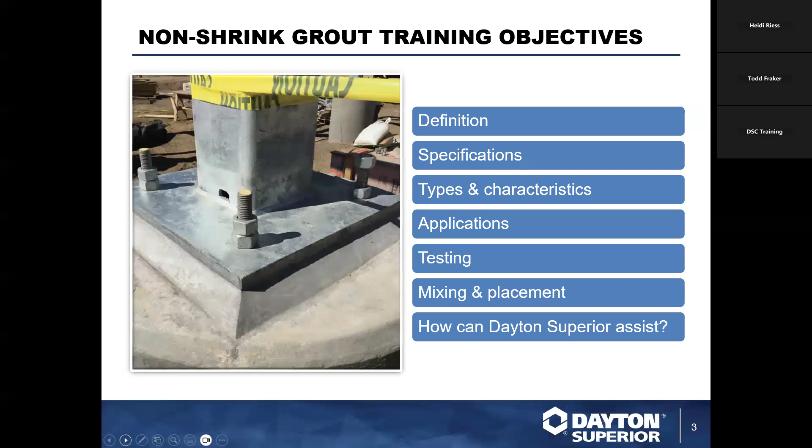A non-shrink grout is a proprietary blend of specially graded aggregates, Portland cement, or epoxy, or other ingredients designed for transferring load, anchoring, and filling of voids. I really take offense when I hear people say it's dirt in a bag. There are a lot of different quality ranges on grout, sources of aggregates, types of cement used in the grout. We pride ourselves at Dayton of having always sourced the best cements and aggregates that make the product kind of the workhorse of the industry. It's one of the more well-specified products, especially the 1107 and the high performance, any other grout in the market.

Clarification: it is not the same as masonry or tile grout. Tile grout can be sanded or unsanded, but it is used for filling a void, hence the term grout, fills a void. ASTM 1107, which is the main governing specification of grout, says that non-shrink grout is intended to be used under applied load. So for our intents and purposes, all our cementitious grouts do transfer load. You'll notice in that picture above on a tile grout, that's not transferring any load at all, it's simply filling a void.

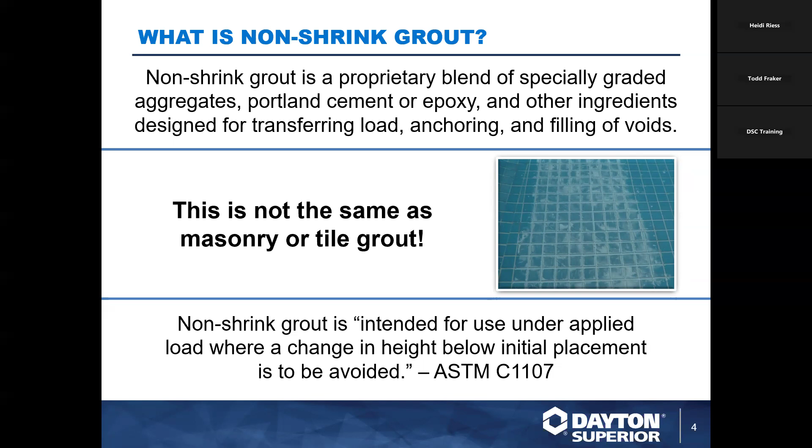Let me get my clicker going again.

Two main specs have been out there for years. The Army Corps of Engineers had their CRD C621, and in 1993, they decided to go ahead and kick it over to ASTM, which is the main governing body for most standard specifications in the U.S. for most all products, including baby strollers and safety helmets. Grouts fall under specifically the ASTM C1107, and within that 1107, there's about 12 to 13 other sub-specifications that actually define how the material is to be used, what strength it's supposed to reach, and how it's to be tested.

So the types of grouts that are prevalent for construction: cementitious, non-metallic grouts. They're dense, water and chloride resistant, resistant to freeze-thaw cycling, commonly specified, readily available, and cost-effective. The whole notion of density comes from the fact that they develop such a high strength generally. 1107 in a flowable consistency will hit around 10,000 psi, as compared to concrete, which maybe hits around 5 to 6 thousand. So it does have more density, therefore it is more resistant to water intrusion or absorption of water. Therefore, it can resist freeze-thaw even better as well.

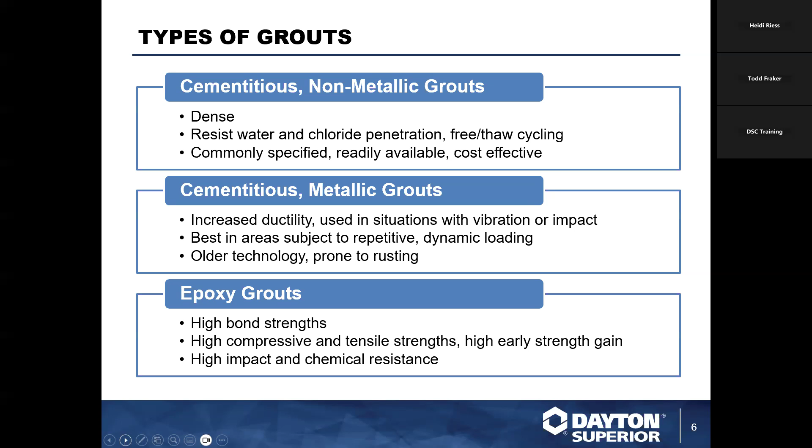Epoxy grouts have very high bond strength. As you can imagine, they're sticky when they're wet. They have very high compressive and tensile strengths, and they have very high early strength gain. More importantly, they have high impact and chemical resistance, which makes them preferable in applications where the grout is going to be exposed to any kind of chemicals. That could be food manufacturing plants, particularly oil and gas, or anywhere where the grout is going to be exposed to a corrosive environment.

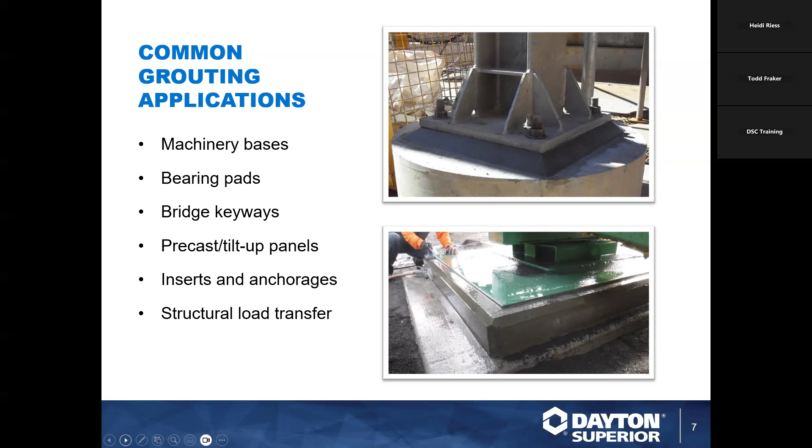Most commonly in our business, if you're working in commercial construction, the ubiquitous base plate, there it is at the top. That's a steel column coming out of a caisson or a pier. Very common in tilt-up construction, very common in commercial construction, any place where you're using columns in conjunction with piers and supporting loads. You can see the grout between the base plate and the pier. Down below is a picture of a machine grouting application, which is using epoxy grout. That's used in applications where we need high transfer of load and great ductility and the ability to withstand vibration.

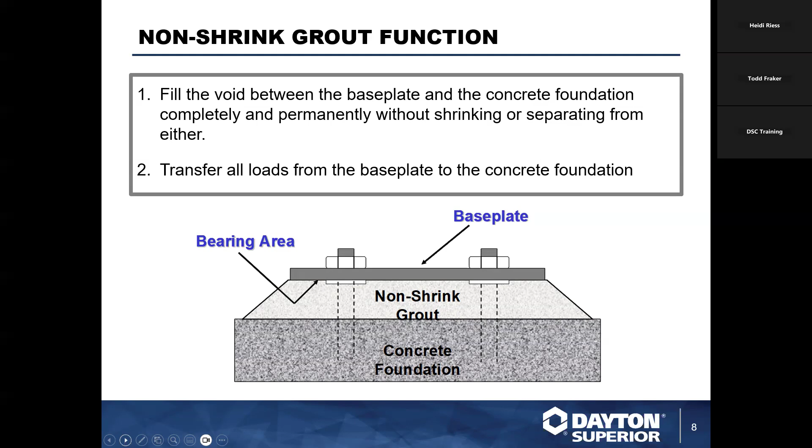A quick little picture here. We've got a bearing area, the base plate. We have the non-shrink grout, which is transferring the load from the base plate to the concrete foundation. Pretty straightforward.

A non-shrink grout must not bleed and must expand after hardening. Here's the key point: we all know that concrete shrinks when it cures. Depending on the water-cement ratio, it can shrink up to 1 to 2% by volume. Non-shrink grouts, by their very nature, are meant to have slight expansion so there's never any shrink back from the load that's attempting to transfer, i.e. in this case, a base plate. Given those parameters, all non-shrink grouts have to pass the 1107 expansion mechanism to compensate for shrinkage.

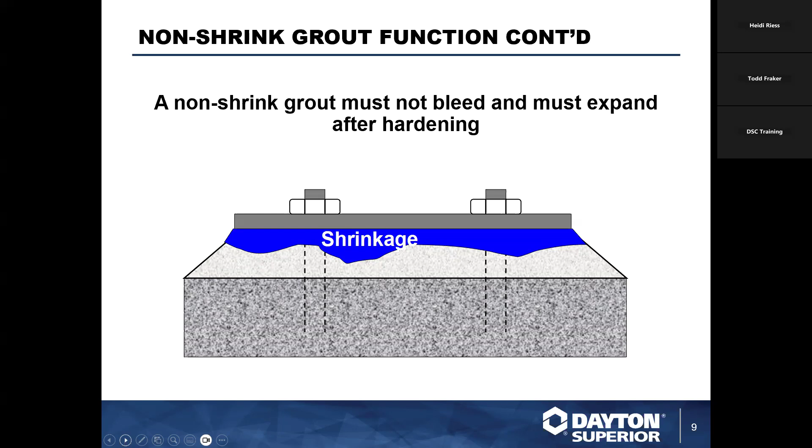So you may hear them referred to as shrinkage compensating grouts. I will never see anything coming out of the back of a ready-mix truck that is so-called shrinkage compensating.

So beware. Surface prep: straightforward, clean and free of dirt, oil, curing compounds, and laitance. If you're going against steel, we want it down to white metal blast, particularly if you're using epoxy grout, so it'll stick. Quite honestly, under a base plate on a tilt-up or a commercial construction where you'd see a steel column, nobody's going to get under there and steel blast it, but it should be clean. They can get under there with a brush maybe, or clean it at least before they put it in place.

Most often the surfaces of the pier that is transferring the load, or the concrete substrate, isn't rough to begin with because they haven't spent a lot of time roughing it.

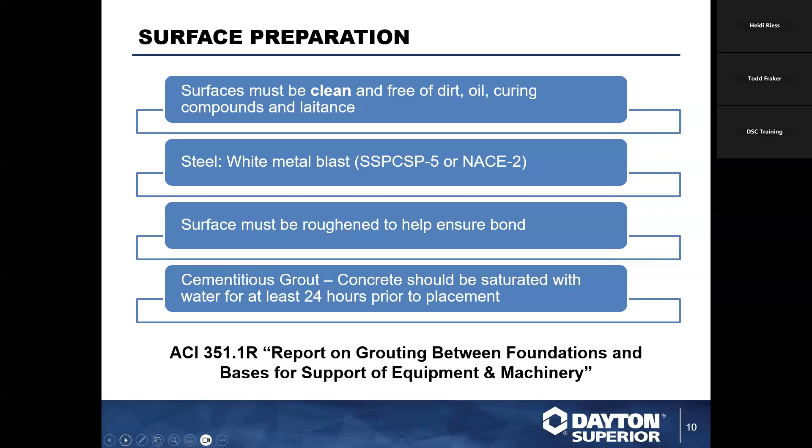Now, ACI does like the substrate to be saturated at least 24 hours prior to placement with water. We know that's not practical, so at least get on there in the afternoon. And 9 times out of 10 cases, and I've spent too much time around construction to know this, they get out there, throw a little water in with their masonry brush, and then start grouting.

So try to dissuade them from that habit and try to get some water in there, either through wet burlap or some other method where it's not onerous for the contractor to wet the substrate. But in all cases, what we're trying to do is stop the dry concrete that the grout is placed against from starving the grout for water. If the grout loses too much of its mixed water, you're going to end up with subpar compressive strengths and a poor grout placement.

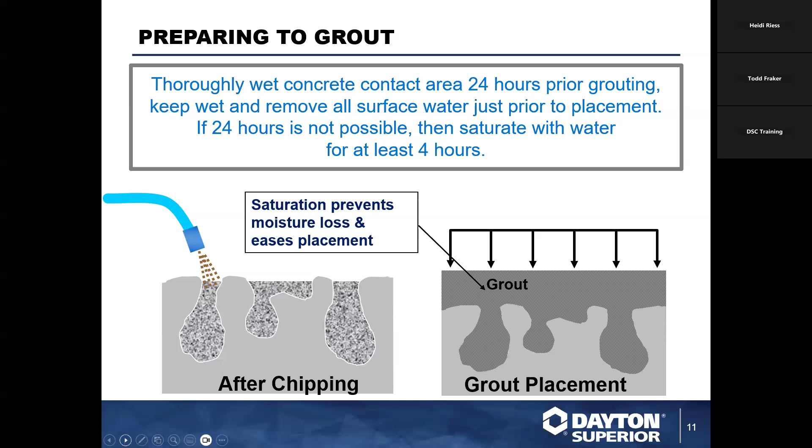Lots of mixing equipment out there for grouts. You've got to look at the type and what you're doing. The largest grout job we were on the last couple years, actually 4 years ago, was the Houston water treatment plant. We set up mixers that would mix about 1 to 2 yards at a time.

They're substantially larger than what you're seeing here in this picture. In the middle is a mortar mixer with a moving blade. Notice these are different than concrete mixers. I should have put a concrete mixer on here with a big X through it saying don't use. Why? Because concrete mixers tend to load up the grout on the blades and not mix it completely and thoroughly through the whole mix. Mortar mixers with rotating paddles tend to mix the grouts very well, and they're also good for epoxy grouts.

There are grout pumps available. ChemGrout down there on the bottom, that's a pneumatic pump, and that'll pump it right through a 1 to 1.5 inch line. When we're doing mass grouting applications, oftentimes those are indicated to reduce the amount of time that batch mixing would require. There's a nice little hand pump, I still see those in dealers to this day. People do buy them and use them. It's very helpful when you're going into a very tight area and you need like a 1 inch line—mix the grout up, put it in a little funnel, and start pumping on the handle.

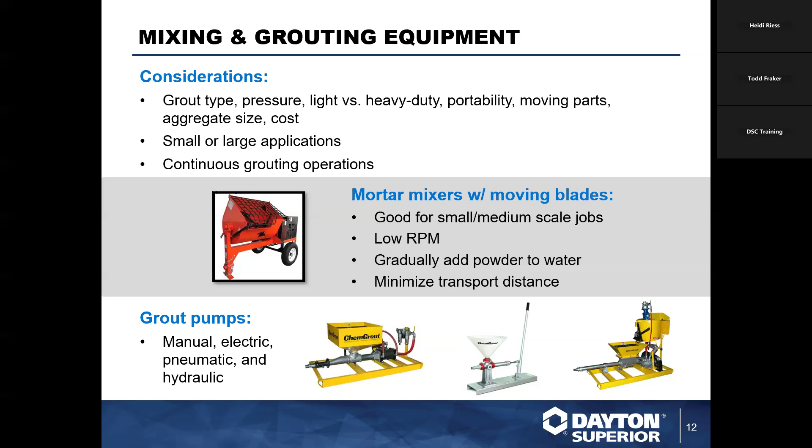Small quantities obviously are mixed in pails every day. Always put the water in the bucket first and then add the powder to the water before starting the mixing. I like to see 5 minutes on the drill at slow speed, not mixing a lot of air into it, to get thorough wetting out of the cement particles in the grout in order to ensure good compressive strength when we're done.

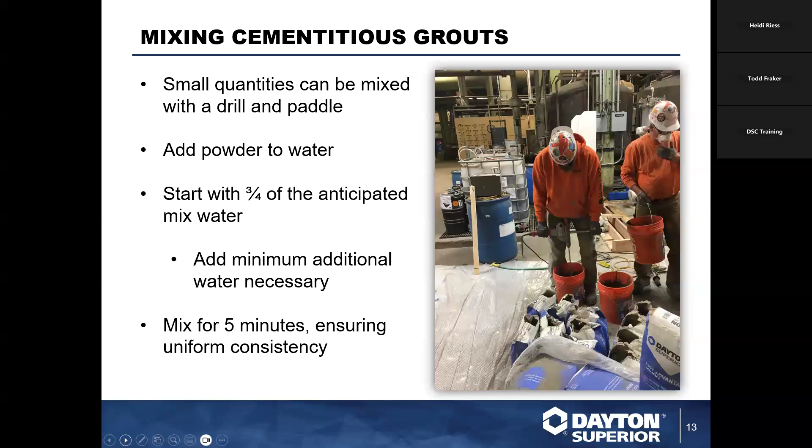All right, we talked about water. Preconditioning of epoxy is a little bit different. If you've got very, very cold substrates, that's going to transfer into the epoxy, even though the epoxy grout tends to exotherm or give off heat as it cures. So if you're working in a very cold application, I recommend that they build a hooch up around the application in order to bring all the substrate and the epoxy grout into at least a constant temperature.

And I mean something up above 50 degrees, because lots of oil field applications in the West require them to work throughout the winter to keep natural gas flowing throughout the U.S., and oftentimes they're working in very, very harsh conditions. Most contractors know that they need to provide for these environmental constraints and provide a way of keeping the substrate and the application warm.

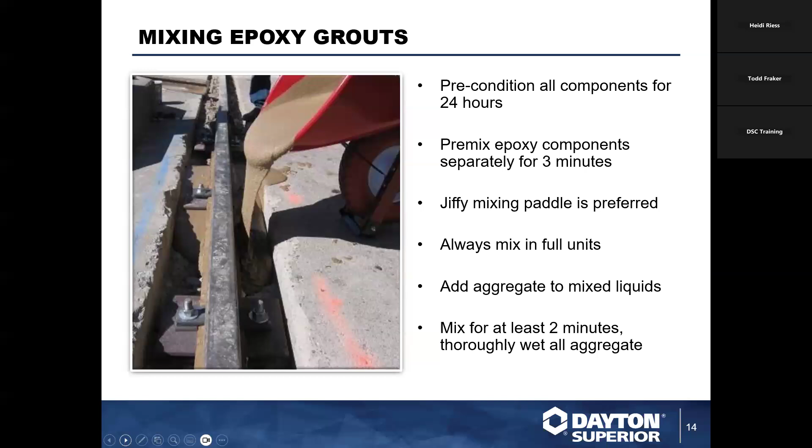Epoxy, you're going to mix the A and the B. It's a 2-part product, the A part and the B part. You mix that first, then add the prepackaged aggregate, which is a little more specialized than just sand. It has various thickening components and things that help disperse the aggregate throughout the mix and keep it from settling out. We provide the aggregate with all of our epoxy grout kits.

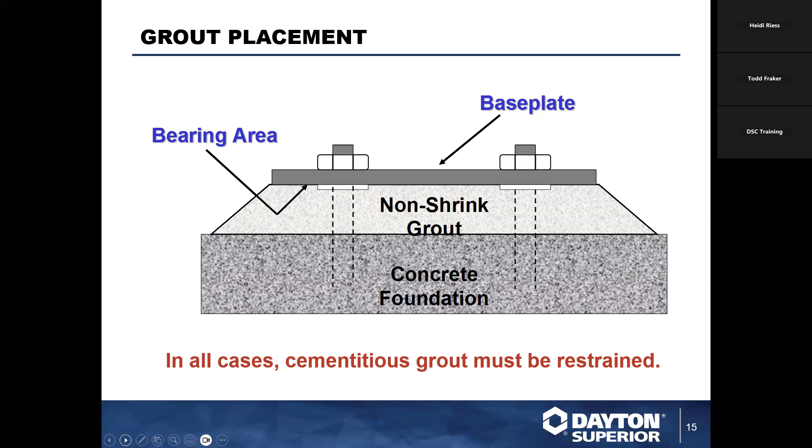Grout placement, there are a lot of different ways of doing it. If you're working under a base plate, using a head box is a great idea to provide downward pressure on the grout to force it to flow underneath. One thing we didn't show is strapping, where they take a piece of metal strapping and pull the grout across the base plate to the other side. I'll also show you another trick with a safety cone. There you can see the grout, cementitious in this case, flowing under a base plate.

We answer a lot of tech calls around here, and in our data sheet we say anything greater than 3 inches should be extended with aggregate. Why? Cementitious grouts generate a great amount of heat, and if that heat isn't dissipated, the grout will tend to thermally crack. Then we get a call, the engineer gets upset, and everybody has to take the grout out and redo it. I'll say this, that's your rule of thumb to go by.

I have approved grout placements as deep as 8 feet in an annular space, which is the distance between the metal lining and a concrete tube. That annular space can exceed 5 inches, 8 feet deep, but you've got a lot of substrate to dissipate the heat off the grout. So there are lots of geometries to consider. The 3 inches is in the data sheet, but if you give us a call, or a customer calls us, we'll walk through it and decide whether or not it makes sense.

3 inches deep is a good rule of thumb, as we said, but if you sell them pea gravel to go with it, you do reduce your amount of sales on the grout. Most contractors don't like to have to add pea gravel to it. They just want to use what's in the bag and be done with it.

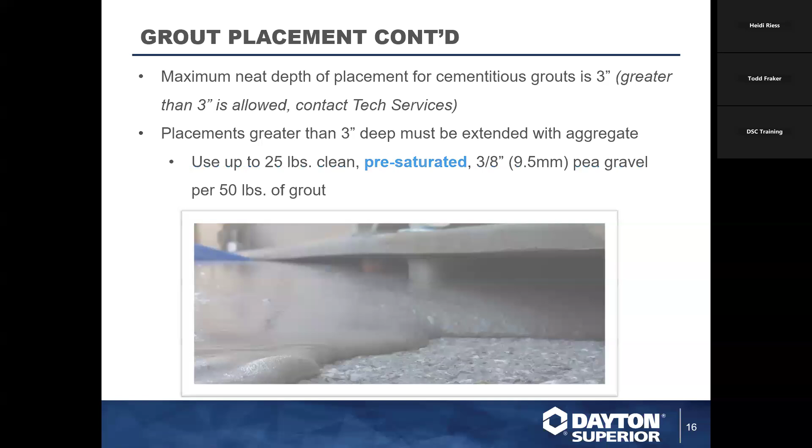Form should extend at least 1 inch above the bottom of the base plate on all sides. That's the form or shoulder in all cases. We could get into a half-hour discussion about the geometry of the forms, forming shoulders, 45-degree chamfers. If you remember from those earlier pictures, the reason we put the 45 in there is to prevent chipping and so the load transfers evenly throughout. It's just good practice we've learned over 80 years of grouting, that a 45-degree chamfer into the base plate will prevent cracking and protect the shoulders from wear.

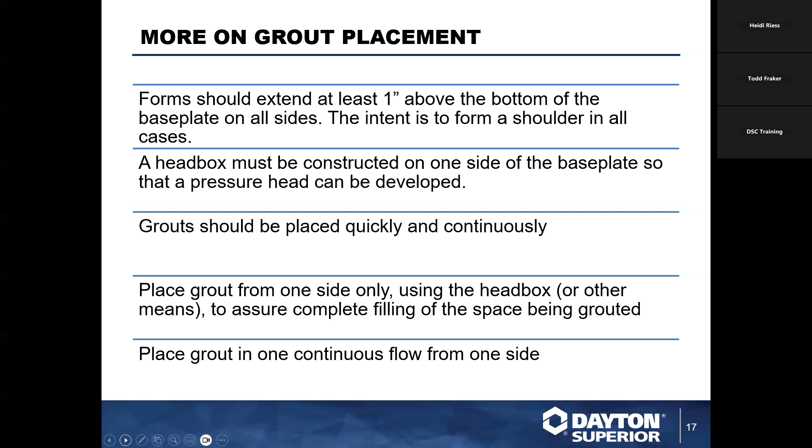I think the rest is pretty straightforward. It should be quickly and continuously placed. You don't want the material setting up while the guys go to lunch, then come back and realize they've got an eighth of an inch gap between the grout and the substrate, with the grout below already hardened. So always place grout from one side of the structure to the other, simply to produce and facilitate flow, so the material builds up, and the head box applies pressure to move it along the grout flow plane.

That's another picture of what we're talking about, flowing it in under the base plate or whatever. Here's a field example of using a traffic cone with the top cut out a little bigger to act as a head box. This was on a wind project up in Ohio. You'll notice the man's footwear is kind of unique - it's because there were so many rattlesnakes up there that they were wearing snake gaiters. But this is a great thing to use on job sites. Traffic cones are readily available, and if they don't want to build a head box, that's a real good trick to get enough pressure on the grout to flow it.

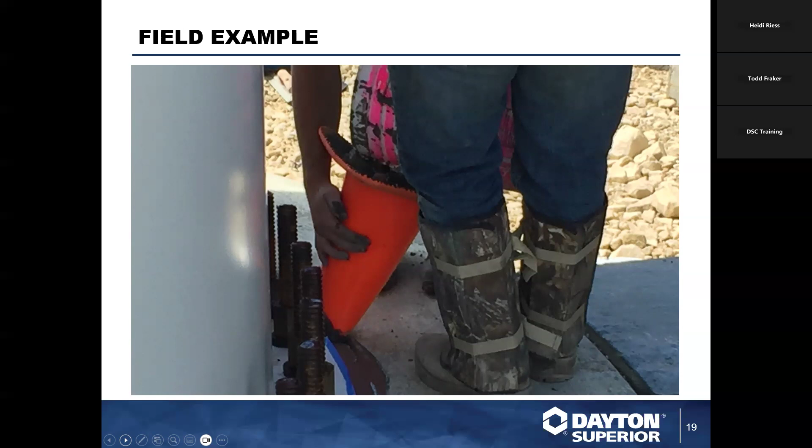This is actually out of an old ACI guide, probably dating back to the 60s, but it showed them with a wood tamper pushing the material in with the forms up one side.

Voids may or may not be avoided. I'll say this also, when using cementitious grouts, try to avoid using any type of vibration, whether it be small stingers or a vibrator on a job, because it causes segregation in the grout.

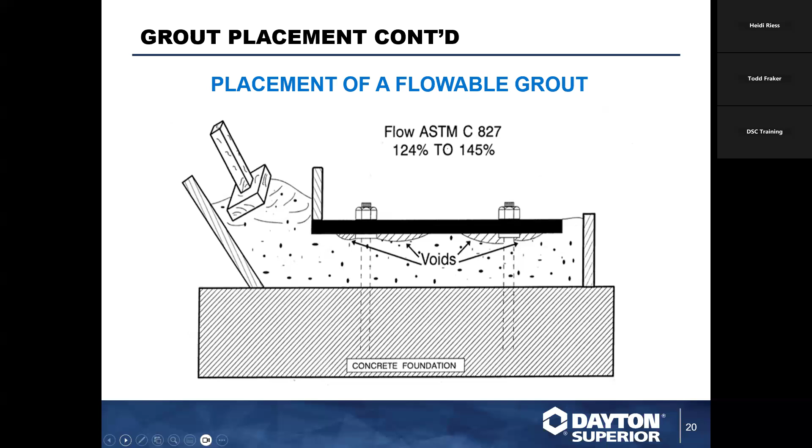Another tip: we had a large commercial high-rise in downtown Los Angeles, and the grout was segregating like crazy and not coming up to compressive strength. The steel structure was transferring all its vibration down through the columns to the base plates we were attempting to grout. With all that vibration going on, it was causing the grout to segregate and flatten out, and we had to cease all activity on the building, welding, plumbing, all of it, in order to get those columns quiet while we grouted in the structure.

All right, example of a dry pack, all kinds of different geometries. Basically, that's what you have to do because the material is very, almost like Play-Doh, I guess is a good consistency analogy, but you literally have to pack it in.

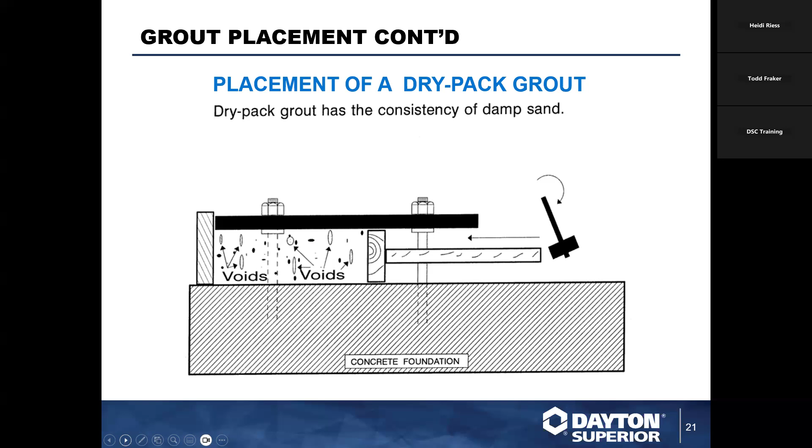Now, you can use a wooden tamper. I did some dry pack machinery, and they were using large 1.5 inch dowels to pack it in, and that seemed to work quite well. So anything that's available, try to avoid metal. Wood seems to like the material better and pushes in pretty good.

All right, now, once grout is placed, we have to maintain curing in it. ACI says that if you've got non-thermal cycling, meaning nothing below freezing for 3 days, day and night, you have to protect it and cure it for 3 days. If you have thermal cycling present, meaning freeze-thaw over a period of time, you have to protect it for 7 days and maintain the temperature.

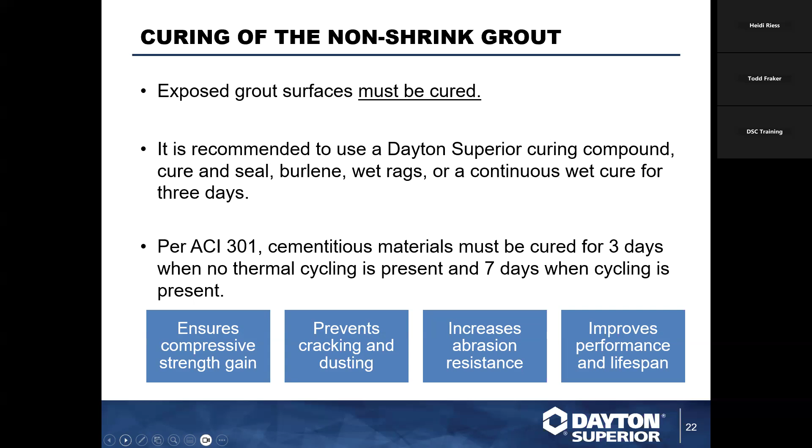You can use a curing compound, any of our Cure and Seals or J9A or J10W or another product. Burlene is burlap with plastic on one side of it. That can be kept wet and will maintain temperature. Wet rags or a continuous wet cure. Most contractors hate wet cure in any way, shape, or form that makes the job site completely messy, but I've seen it used in high-performance cements, not necessarily grouts. Wet rags are good as long as they're kept wet.

All right, cold weather grouting. What are the procedures? Cement hydration stops at 32. More importantly, when it drops a little bit lower than that and it's not protected, the water that hasn't been taken up in the grout matrix will begin to freeze. When water freezes, it expands, it blows up your grout. Cold temperatures slow down the cure time on the grout too. It slows the hydration of the grout.

So again, we talked about making accommodations for difficult environmental conditions like tenting. Most contractors will refer to it as a hooch, H-O-O-C-H, not to be confused with the kind you drink.

Oh, you got my... Condition the grout. Well, you took it away from me, Todd. Sorry, Heidi.

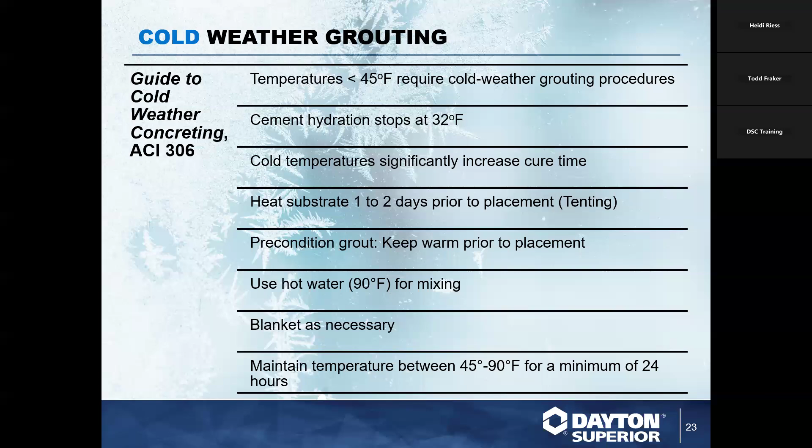All right, you want to precondition the grout. That means, at minimum, keep it out in the conex to at least get some warmth to it, because cold powder and warm water, you end up with kind of cold grout too. Hot water can be used for mixing if it's available. Blanket as necessary. Maintain temperatures between 45 and 90 for a minimum of 24 hours.

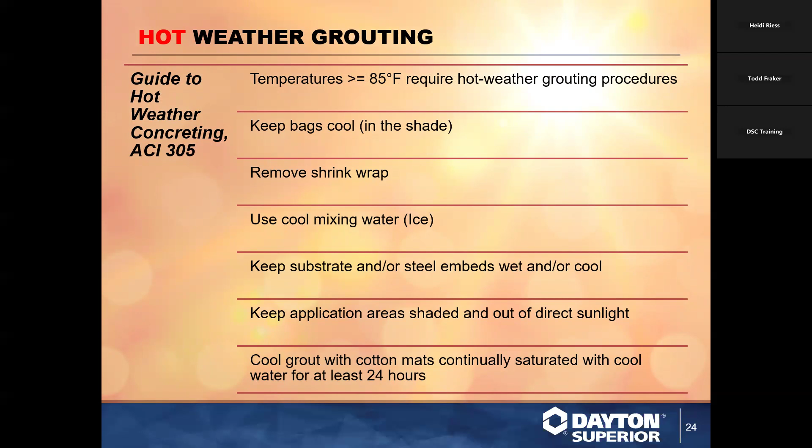Hot temperatures, same problem. You get flash set, water gets too hot, bags are too hot out in the sun. They can't get it placed and keep it flowing before it starts kicking off on you. So just the rule of thumb is hot weather will kick it off sooner, try to use cold water. Cold weather will slow it down and stop it from hydrating, so try to use warm water and keep the grout warm prior to use.

Now we're going to get into testing. This is, without a doubt, our number one issue at Dayton Superior, and I would suggest any competitor probably has to go through this as well. How many calls do we get, how many trips do we have to take, when we get a call saying your grout is not coming up to strength? What's going wrong, what are we doing wrong, or your stuff's no good?

Well, they're not testing it based on our published strengths. Our published strengths are based on a C109 test, which is a particular geometry for the sample. It is maintained at a particular temperature for a particular period of time. I can't tell you how many times I've gone to a job site and they're testing the grout like concrete. They're putting it in a large cylinder, and those cylinders are like 4 by 8.

You've seen them on the job sites, and it's filled with grout. And the guy goes, 'What?' And I said, '1107 ain't ready mix.' So I've had my tussles with testing labs, but hopefully they've learned something along the way.

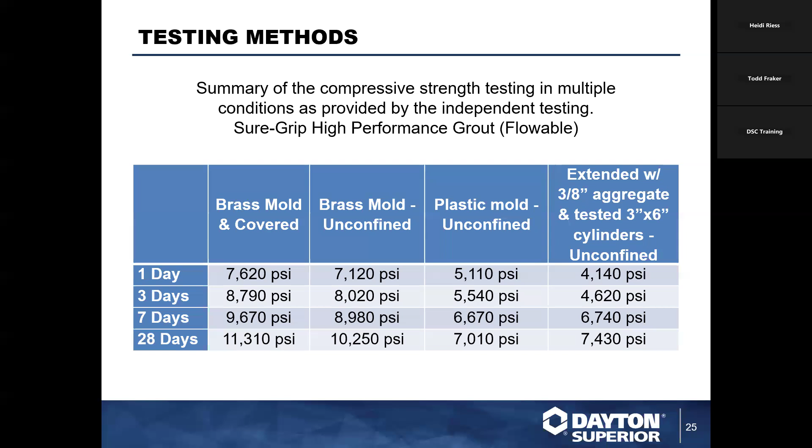You'll notice the difference in strengths, it's significant. The one we recommend is per ASTM, right down the line - that's a brass mold and covered. You can use the brass mold uncovered and you'll lose 500 PSI. You can use the plastic molds, which are the little plexiglass guys that are not covered, and sometimes they'll put a little ice cube tray in there. They're plastic, and you drop down by another 2100.

That's the other thing - if we say 1 gallon of water per 50 pounds for a flowable consistency, and you hit this strength, we mean 1 gallon of water. We don't mean I emptied out a Gatorade jar, and I think it's about a quart, or maybe more or less a quart, whatever. You got to hold their feet to the fire and make sure it is, in fact, measured water, because when we formulate these materials, the water-cement ratio, in this case the grout water-cement ratio, is highly critical.

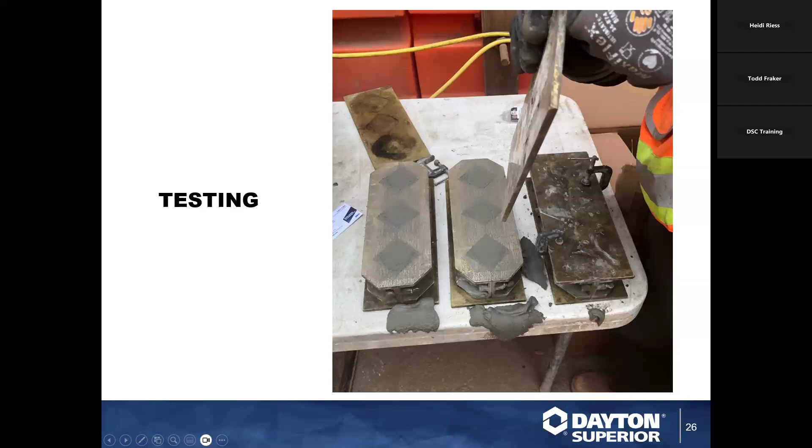In this case, the testing lab was leaving them in a cooler out on the job site. I was okay with that. The ambient temperatures were running about 55. It was the Pacific Coast, so guess what - they were staying about constant. If they test the grout at 55 during the day, and then they go away at night, and they don't put it in some kind of insulated cooler, and the temperatures drop down to 32, they come back and try to get their 24-hour breaks. Guess what, are they going to be lower or higher? They're going to be a hell of a lot lower, and it's not going to be good. So you have to maintain temperature in the test.

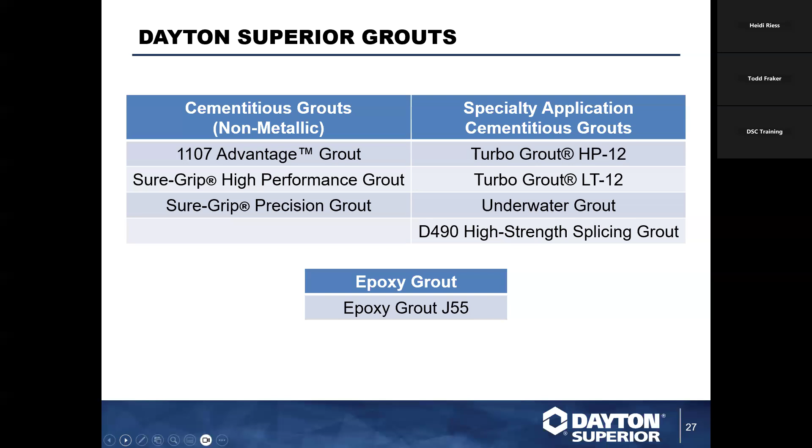All right, so 1107 Advantage grout meets the 1107 specification, non-corrosive - in all cases you're going to see grouts called out as please don't let them be corrosive. Well, they're not corrosive. They haven't been corrosive in 20 years, but architects and engineers are slow to update their master specs. It's pourable, pumpable, or dry pack.

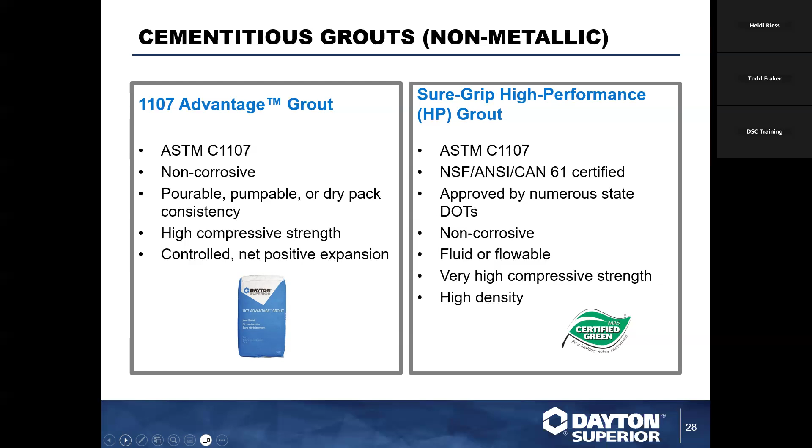All right, the precision grout was brought out in order to handle the objection to gas-forming grout. So now you get a quick lesson in the expansion mechanisms in grout. There's really only two ways you can do it: gas-forming, which produces microscopic bubbles that expand the grout, or controlled ettringite. Ettringite is nothing more than a type of clay, the thing that causes clay to swell when it gets wet.

Occasionally you'll see a specification where they don't want gas forming. If that's the case, then you have to go with the Sure Grip precision grout. Neither of those expansion mechanisms bear on the final performance of the grouts. They both work excellently regardless of the expansion mechanism you have.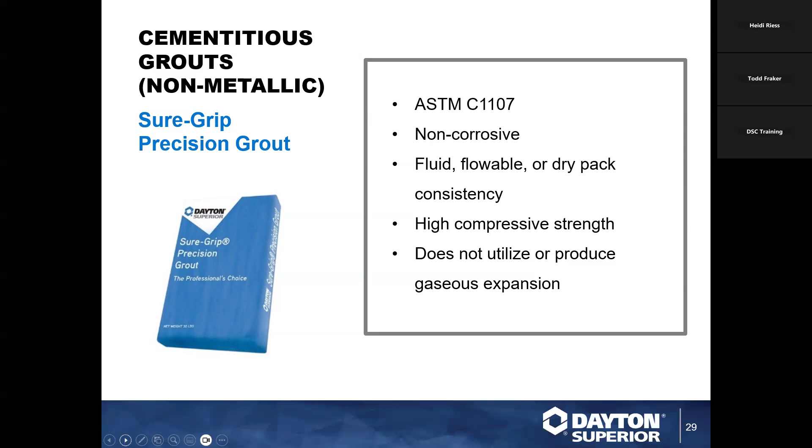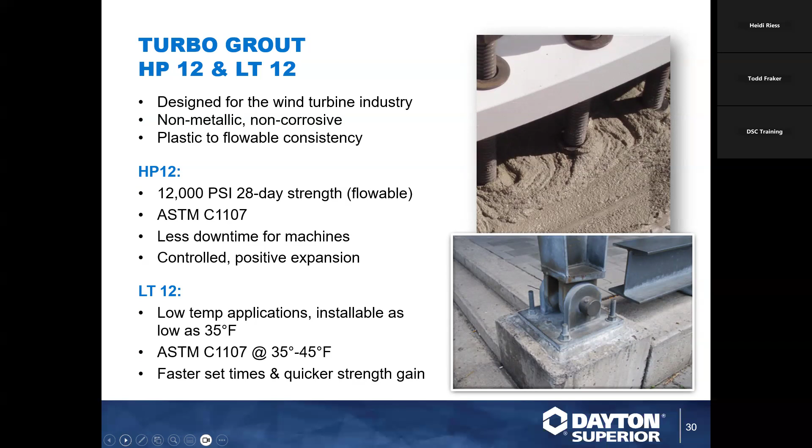All right, the Turbo HP12 was designed for the wind turbine industry based on the strengths they were asking for, as you can see in the upper picture. The low temp is used for low temperature installations. Our data sheets say plus 40 on the application temperatures, but truth be known, if it's kept at room temperature and the substrate's not too cold, you can drop down to the mid 30s. The LT12 was designed specifically to perform in low temperature grouting applications.

Underwater grout was designed to resist washout in underwater or tidal zone grouting applications, especially when jacketing piles. It's usually pumped from the bottom within the jacket pile as the rehab goes on, and it won't wash out. Now, does that mean you use salt water to mix it? No. In all cases, grout has to be mixed with clean, potable water, not salt water, not sewage water, nothing out of the local creek.

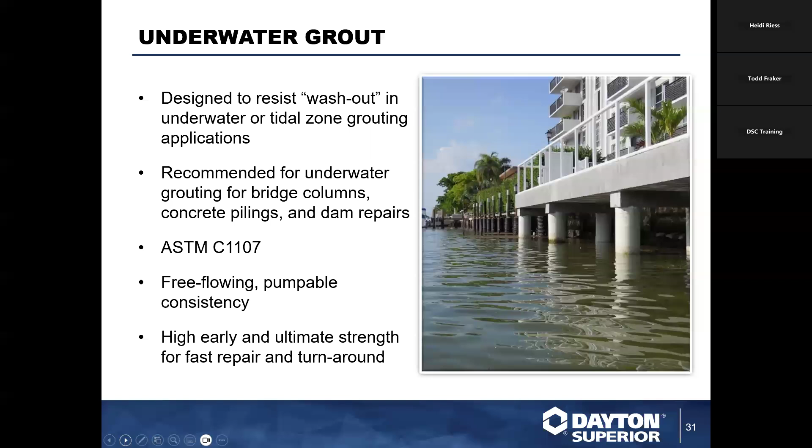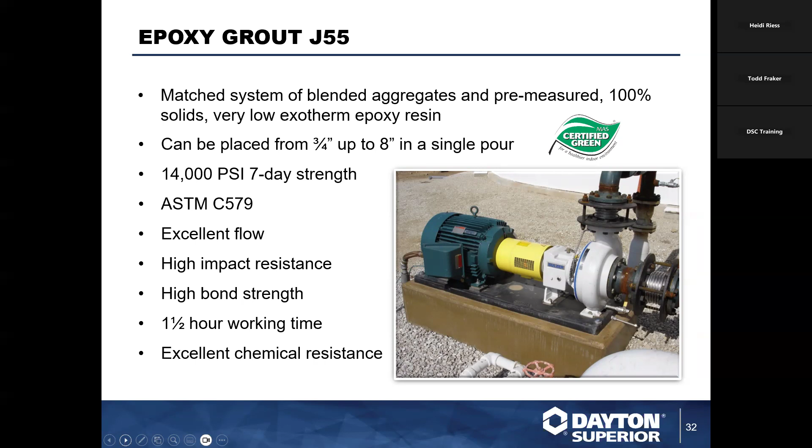All right, epoxy grout has its place, and there's a picture of a nice little machine with a big chunk of epoxy grout underneath it. They can be placed into fairly thick pours - 8 inches is pretty significant. We can hit 14,000 PSI in 7 days, referring to the ASTM C579 specification. Great flow, great bond strength. Again, it takes vibration and it has excellent chemical resistance, better than a cementitious grout.